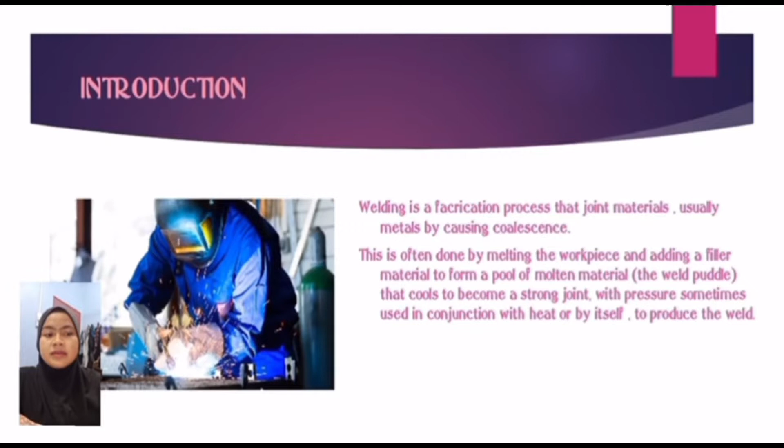Next, history of welding. When was welding invented? The first example of welding found by archaeologists dates back to 3000 BC. The ancient process of welding typically involved simply hammering two pieces of metal together under heat until they joined. Technically speaking, conventional welding as we know it today was invented in 1836 when English chemist Edmund Davy discovered acetylene gas.

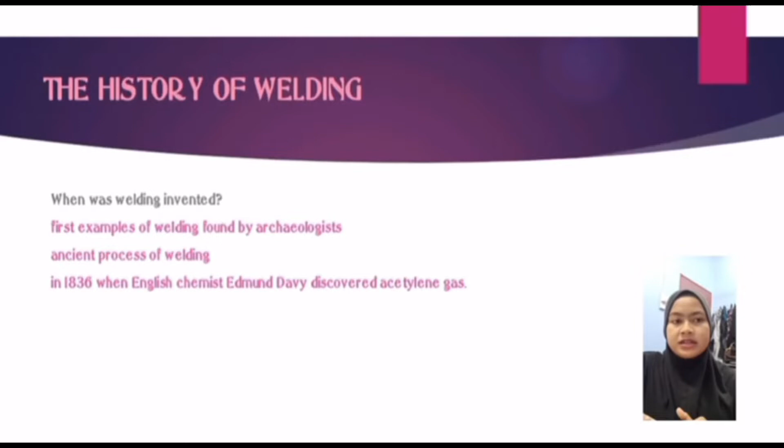Next, who invented welding? During the Iron Age, Egyptians first learned how to weld pieces of iron together. Archaeological evidence of early Egyptian welding dates back to 3000 BC. In 1881, Russian inventor Nikolay Benardos introduced carbon arc welding, which was the first practical arc welding method of its time.

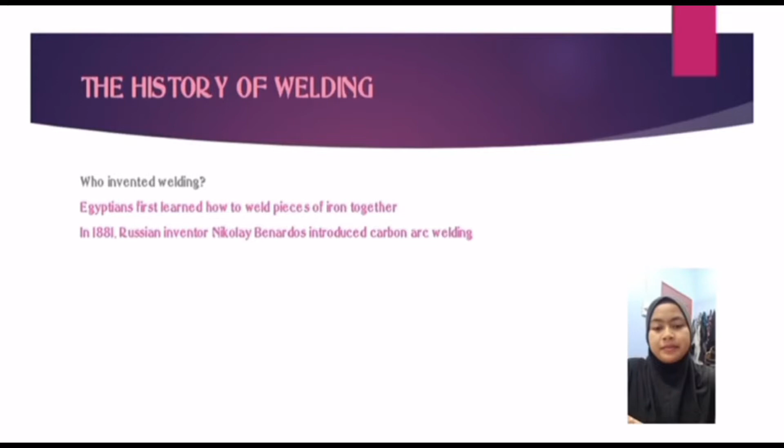Next, where was welding invented? Different types of welding can be traced back to many locations over thousands of years. Archaeologists found the oldest examples of welding in Egypt and the Eastern Mediterranean. Significant advancement in modern welding can be traced to Russia and England.

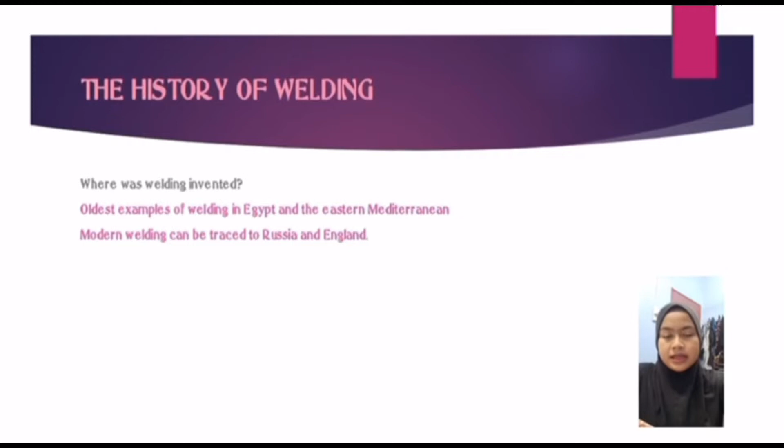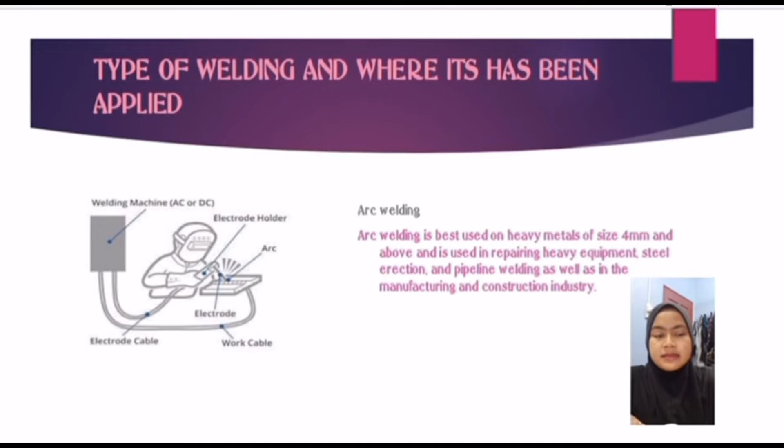Type of welding and where it has been applied. First, arc welding. Arc welding is best used on heavy metal of size 4mm and above, and it is used in repairing heavy equipment, steel erection, and pipeline welding, as well as in the manufacturing and construction industry.

MIG welding works well with a variety of alloys like stainless steel, aluminium, silicon bronze, magnesium, copper, and nickel. It is used in automotive repair, construction, plumbing, robotics, fabrication, and maritime repair.

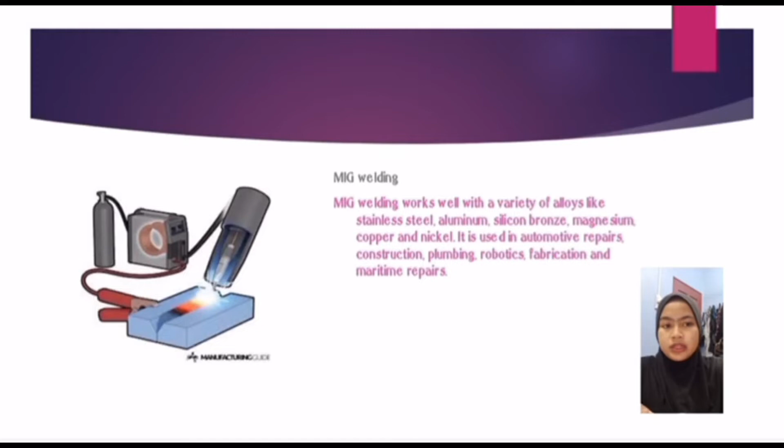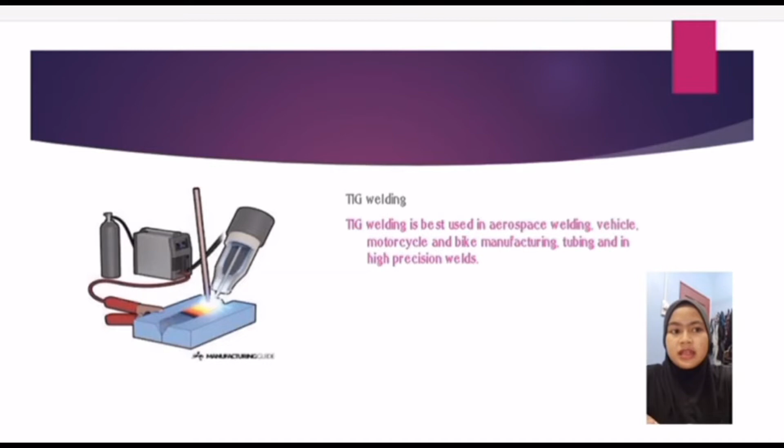TIG welding is best used in aerospace welding, vehicle, motorcycle, and bike manufacturing, tubing, and high precision welding.

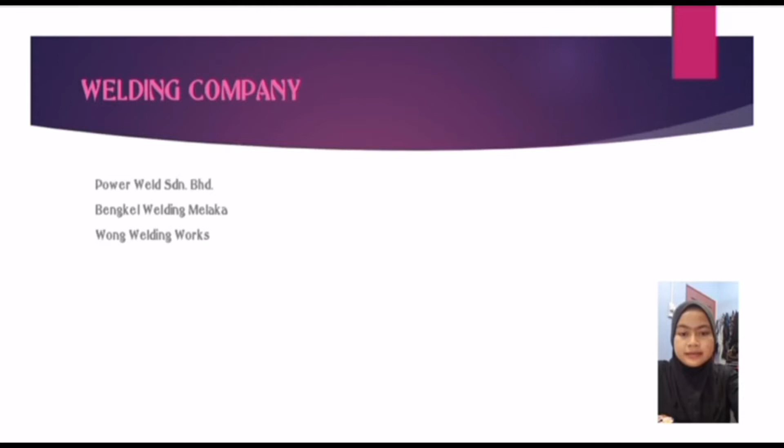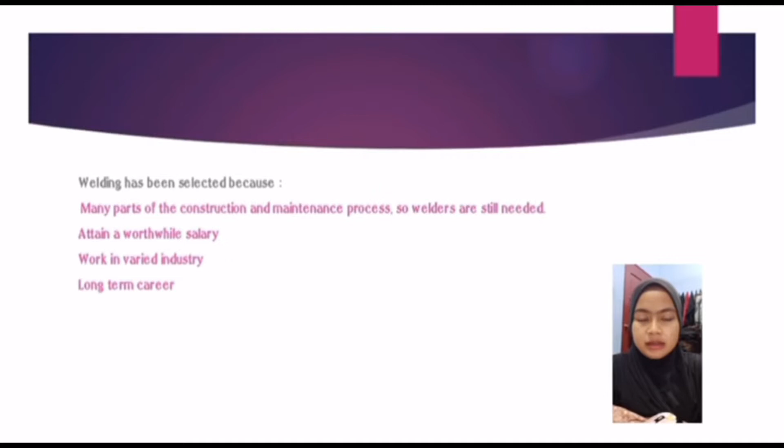There are 3 welding companies I have listed, which are Power Weld Sdn Bhd, Bengkel Welding Melaka, and Wong Welding Works. Welding has been selected because many parts of the construction and maintenance process require it, so welders are always needed, attaining a worthwhile salary, working in varied industries, and having a long-term career.

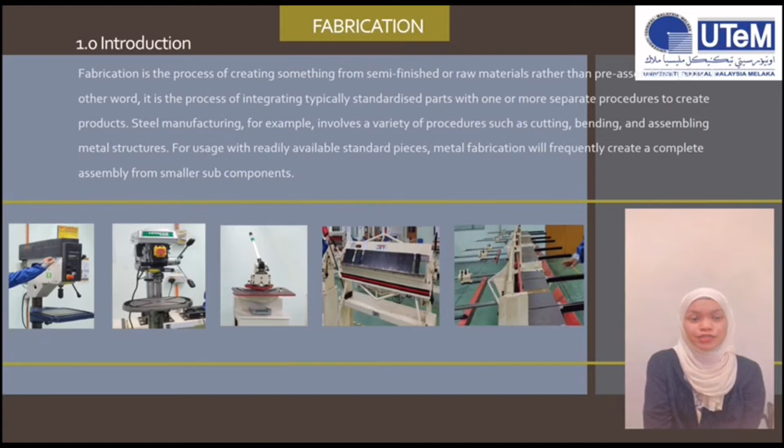As you can see below, there are a few pictures of equipment that we as students use in our laboratory practice, and I believe that among this equipment are also used in some other manufacturing companies out there.

So there are 6 most common methods of fabrication process, which are cutting, punching, stamping, welding, bending, and shearing. These processes may have different ways of working, but the purpose is one: to turn raw material into items that can be used in construction, home, and assembly lines.

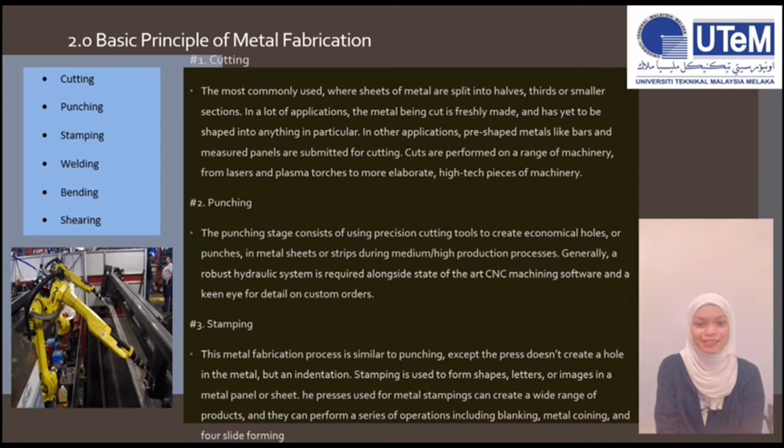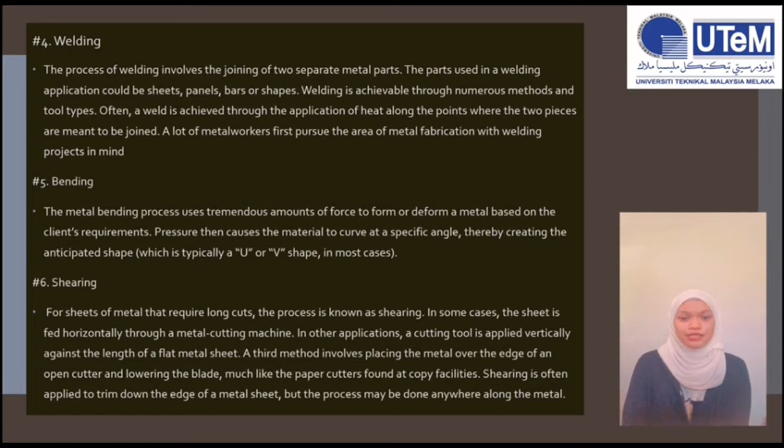Nowadays, fabrication is applied in the manufacturing industry, hardware and hand tool industry, and also other industries and applications like the energy sector, forging, and stamping.

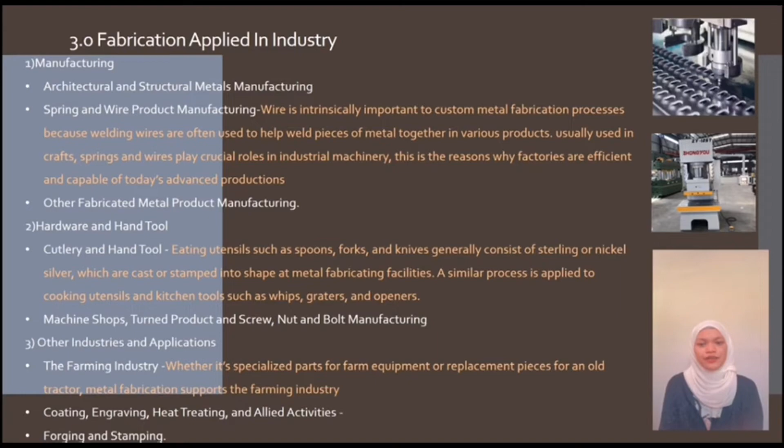As you can see, the first picture is a CNC punching machine that fabricates holes in sheet metal. So the product can either be a piece of metal with holes for fastening purposes, or a sheet metal piece called blanking. The second picture is an industrial stamping machine, and this is able to form shapes, letters, or images in a metal panel. They can also perform a series of operations including blanking and metal coining.

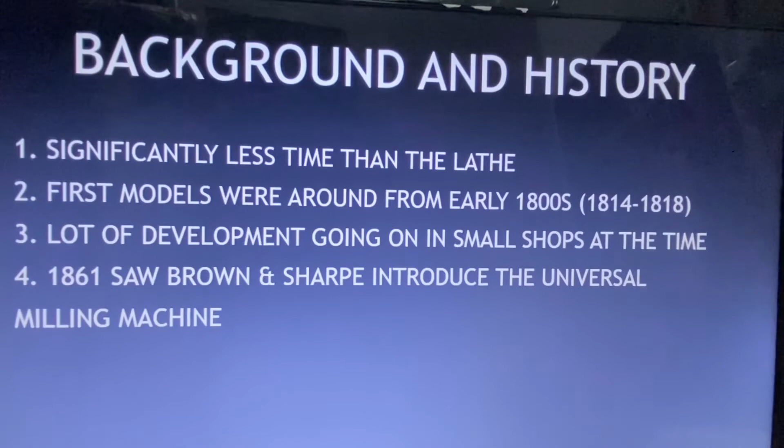Milling machines have been around for significantly less time than the lathe, but they're still more than 200 years old. Records show that early models were around from 1814 onward, though it's hard to trace them back to any specific name or business. There are so many types of milling machines, which are vertical, horizontal, duplex, CNC, turret, bed type, column, and rotary table.

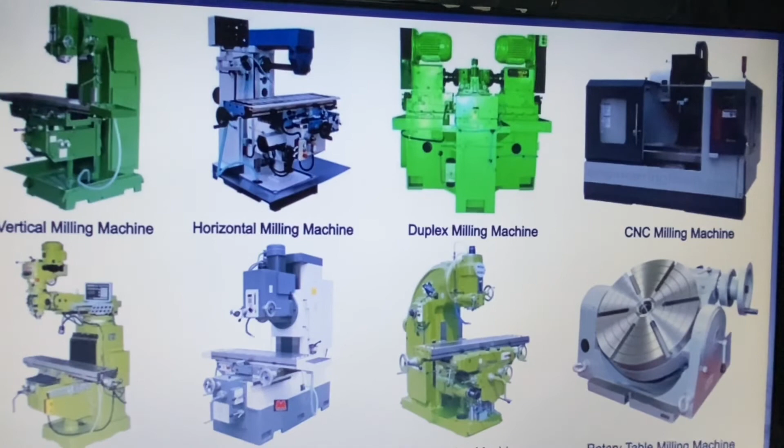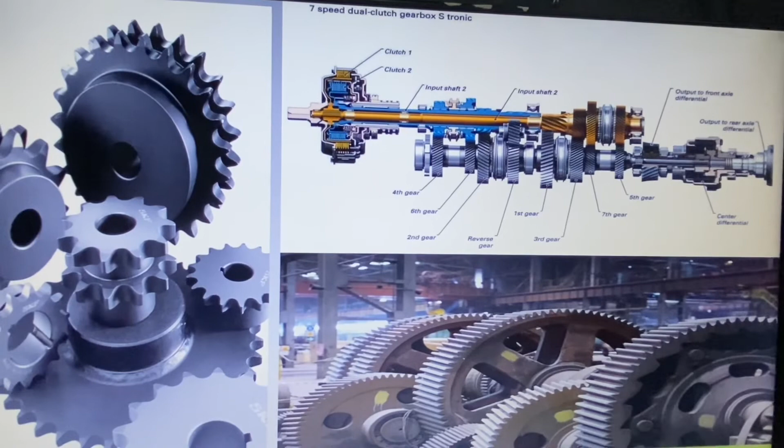Okay, this one is a horizontal milling machine, and this part has been manufactured by a horizontal milling machine. This one is a 7-speed dual clutch gearbox, and here is the gear for industry use. This one is a vertical milling machine, and this is a product that has been created from a vertical milling machine.

So the advantages of up milling are no backlash, suitable for casting or hot rolled steel, and lower milling force. Disadvantages of up milling are that the length of chip is longer than down milling, force tends to lift the workpiece from the table, it needs good fixturing, has lower cutter life, and results in rough surface or machine marks.

Lathe is a tool that rotates the workpiece on its axis to perform various operations such as cutting, sanding, drilling, or facing and turning, with tools applied to the workpiece to create an object with symmetry about an axis of rotation. Lathes are used in wood turning, metal working, metal spinning, and glass working. Lathes can also be used to shape pottery.

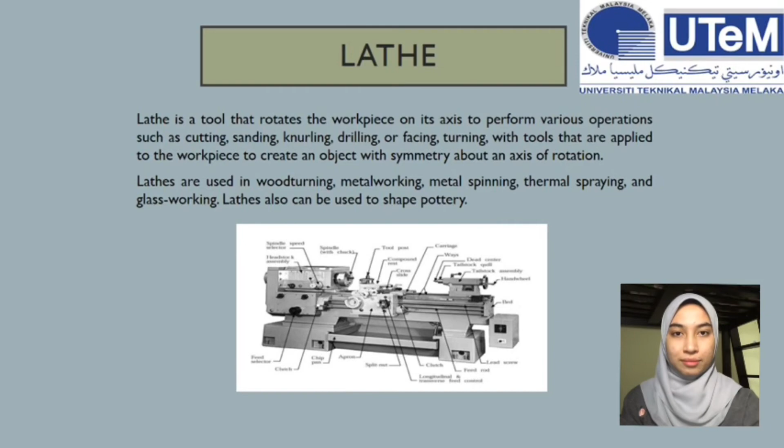Turning basic principle: turning is a process of producing parts that are basically round in shape. Turning can be performed on both external and internal surfaces to produce an axially symmetric contour part. A workpiece is rotated about its axis, and a single point cutting tool is fed into it, shearing away unwanted materials and creating a desired part.

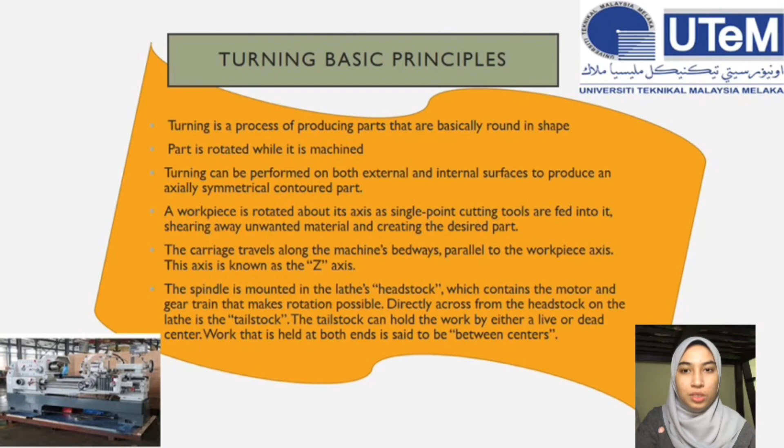The carriage travels along the machine bedway parallel to the workpiece axis. The spindle is mounted in the lathe headstock. Directly across from the headstock on the lathe is the tailstock. The tailstock can hold the work by either a live or dead center.

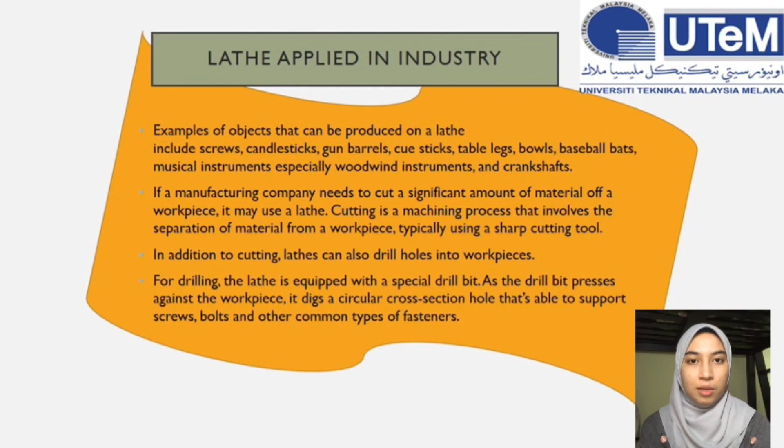Lathe applied in industry: if a manufacturing company needs to cut a significant amount of material from a workpiece, it may use a lathe. Cutting is a machining process that involves the separation of material from a workpiece, typically using a sharp cutting tool. In addition to cutting, lathes can also drill holes into a workpiece; for drilling, the lathe is equipped with a special drill bit. Examples of objects produced in industry using a lathe include screws, candlesticks, table legs, bowls, baseball bats, and crankshafts. That's all from us.